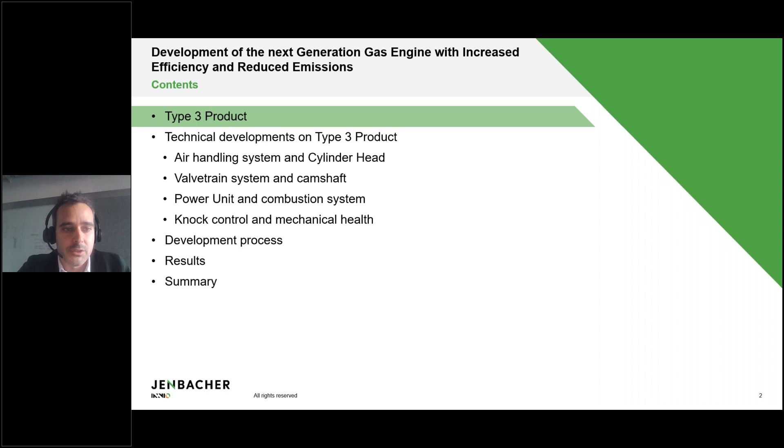I would like to focus later on the development process as well, which are the key steps, what have been the key enablers to bring us to those results as well. And then I will finalize with a fact sheet on this product and the latest results on it.

The Jenbacher Type 3 product has a long history. We have a huge installed fleet from the 312, the 12-cylinder engine version with power output up to 635 kilowatts electrical power output, the 316, the 16-cylinder version at 845, and the 320, which is the 1+ megawatt product that we have in our portfolio with more than 6,000 units delivered across the world.

A standard product, as you can see. Switch to the pointer. As you can see, bore stroke, it's at 2.44 liters per cylinder. It's a direct ignition combustion concept with a specific power output up to 18 bar BMEP, and the product is capable of 50 and 60 hertz.

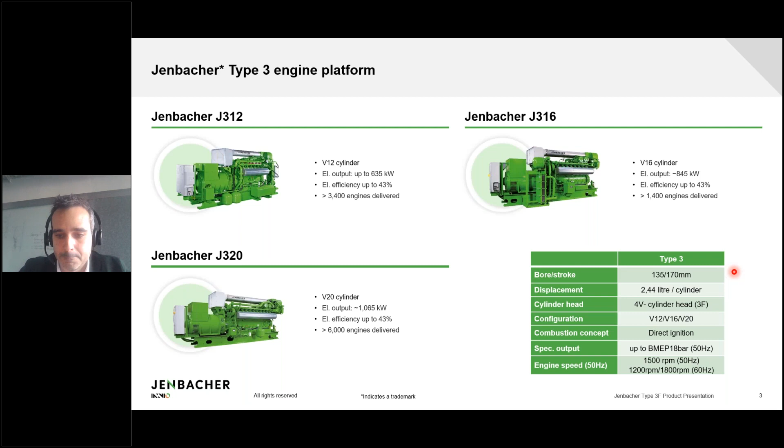So a bit more about the history of the product. When the development of this product started, it was in 1988 with the A and B engine versions running at a slightly lower power output and a lower efficiency, but it started to cover already a wide variety of fuels, biogas, landfill gas, and that has been one of the strengths of this product.

The fuel flexibility and the robustness to deal with a huge variety of different fuels. Afterwards, we moved to the Type 3C, which represents the biggest part of our installed fleet, covering as well a huge variety of fuels. In 2013, we introduced the Type 3D, and next year we are serializing the Type 3F, the next generation of this product, increasing efficiency, increasing fuel flexibility, and reducing hydrocarbon emissions. On top of it, as I will mention at the end of the presentation, we will release as well the Ready for Hydrogen, Ready for H2 package together with this product.

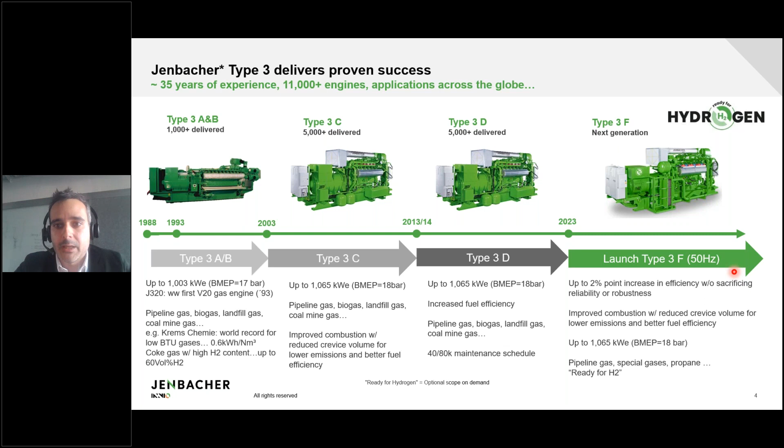Moving forward to the technical developments and product improvements we've introduced, we developed a high-performance cylinder head. The development steps started from 1D simulations, defining the valve sizing and port flow based on 1D analysis, then determining the right ratio of intake to exhaust valve diameter based on the 1D simulations and port flow measurements.

This has been the optimization path we followed to reach the most efficient PMEP and the most efficient gas exchange. Beyond that, we took actions to understand skew angle, flow, and port type to select the right trade-offs with the design constraints, looking at the mechanical CTQs from the FEA analysis, and optimizing swirl level and flow ratio around the two ports of the 4-valve cylinder head.

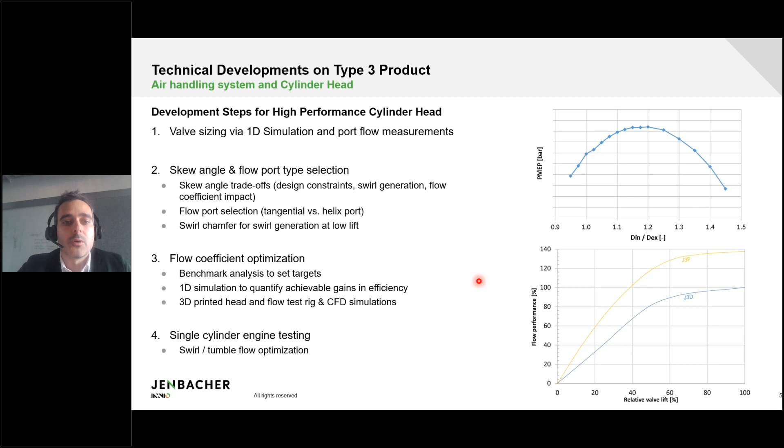We went through an optimization loop of the cylinder head flow by adapting the ports, and by doing that we managed to increase the flow performance in average intake and exhaust by 30 to 40%. That was one of the biggest enablers for the fuel efficiency increase on this product, all while sticking to the same combustion concept proven to be very robust and reliable for the variety of fuels.

We went through an additional development on the valve train and camshafts. We adapted the camshaft profile for the introduction of a 4-valve cylinder head on this product, which wasn't available yet. We went through an iterative process of performance optimization, mechanical analysis, and the final check of all the CTQs and requirements.

Those have been the loops we went through with the objective of optimizing gas exchange and volumetric efficiency, reducing hydrocarbon emissions, but also providing sufficient knock margin to enable higher, further increased fuel flexibility for this product.

Since this is a well-established product in the market, one key focus was maintaining reliability. This is why it's been one of the key development targets, focusing on mechanical requirements and choosing the right trade-offs. Optimization variables included valve timing and valve lift to match the gas exchange, adapting the Miller timing and valve overlap to meet our targets on hydrocarbon emissions.

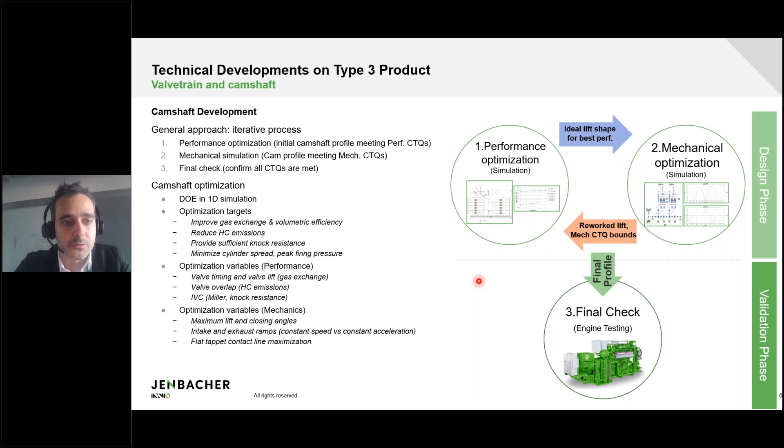That helped increase the knock margin and also reduce hydrocarbon emissions through a shorter combustion duration, ensuring that at the point of exhaust valve opening we had a successful, more complete combustion that reduces hydrocarbon emissions.

Beyond that, we went a step further to optimize the piston bowl shape for different compression ratios, so we could have a product optimized for different applications in terms of compression ratio.

To have an optimum solution for all those variants, we went through a loop of optimization on the aspect ratio of the bowl shape, enabling an additional efficiency increase for those increased compression ratios, and therefore we achieved an increased knock margin and improved efficiency on those higher compression ratio versions.

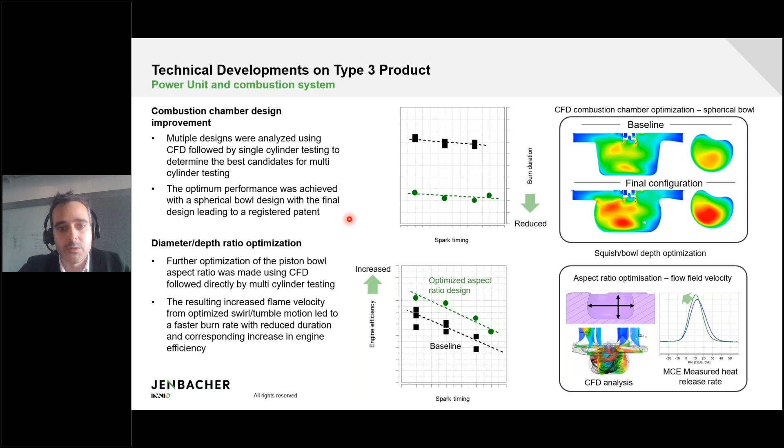We went through that process of iterations between the CFD and single-cylinder engine testing, and the final optimization was conducted at the multi-cylinder engine at our development test benches to achieve this goal.

Knock control and mechanical health are definitely a big benefit of this product as well. We introduced a state-of-the-art knock control system to enable increased fuel efficiency, increased overall efficiency, and increased fuel flexibility. By introducing that, we also had a chance to introduce additional mechanical health features that enable condition-based maintenance, allowing our customers to plan their service interventions with more flexibility.

Those measures are only possible because of the enhanced detection of valve closure and knock behavior. We now have closer detection of the different events in the cylinder head, and can adapt our combustion chamber cleaning intervals and lash setting intervals to those events. This is one of the big benefits of the system we're introducing now on the Type 3 product.

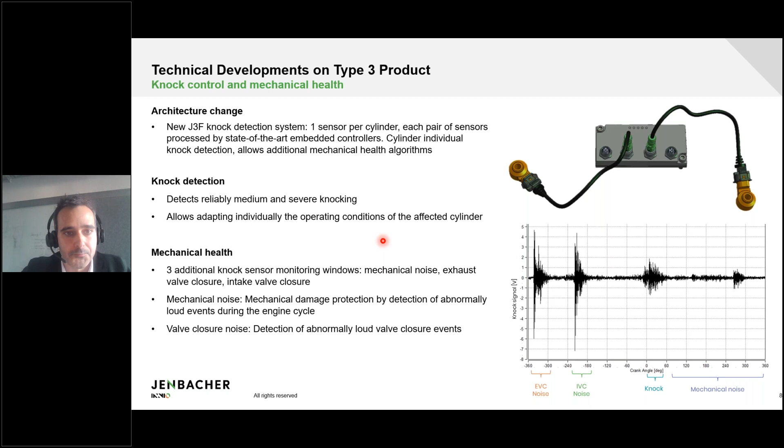We started from a very detailed requirement document. We broke that down into all the different subsystems so that we had clarity for each on the requirements and the test, the DVP&R, that is the design verification plan and report for this product. So at the end, we developed a test plan that was derived from the requirements.

and was derived from the risk management tools, or from the FMEA. At the end, the FMEA plus the breakdown of requirements to the subsystem level enabled us to come up with a solid test plan that brought us to the final successful results.

We based that on the classical V model, making sure we have the requirements laid down and clarified for each of the subsystems, and that enables us to go through all the systems case by case and requirement by requirement, making sure we have full understanding and a clear validation path for each of the different subsystems.

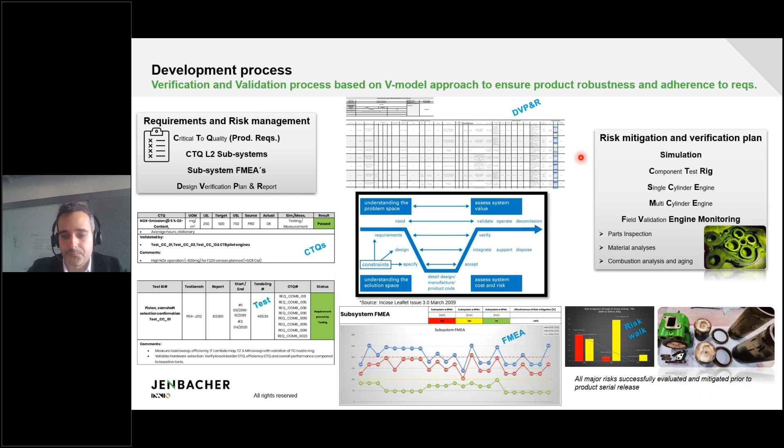As a summary of this product and this product improvement, we have introduced a flow-optimized 4-valve cylinder head that enables fundamentally an improved gas exchange and improved efficiency.

We have introduced a new power unit that reduces hydrocarbon emissions by tackling crevice volumes, and as well introduces a modified combustion bowl shape that improves fuel efficiency and reduces the burn duration, therefore increasing fuel efficiency as well.

We have also introduced a more service-friendly and improved valve train system that reduces maintenance efforts by pretty much 30 to 40%.

We have introduced here as well, as part of this product, a modular and flexible coolant piping that enables more modular service activities on the engine as per needs. And we have introduced, as I stated before, a cylinder-individual knock control for improved fuel flexibility and condition-based maintenance.

The new camshaft enables definitely increased efficiency and reduced hydrocarbon emissions by reducing valve overlap and optimizing the gas exchange.

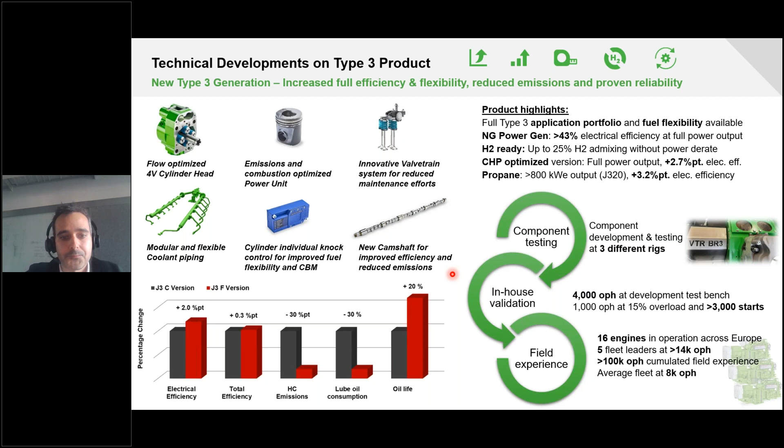And having that as summary, I'm at the end of my presentation and happy to get your questions.

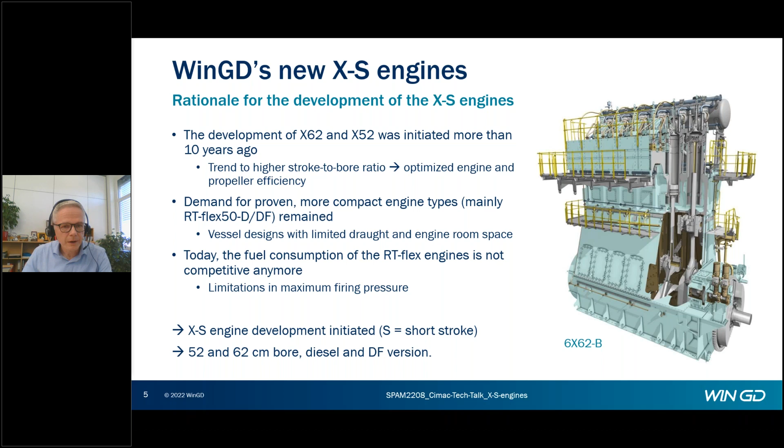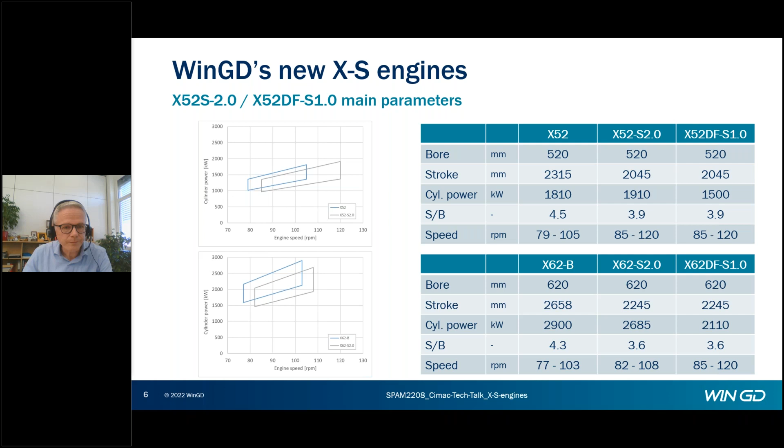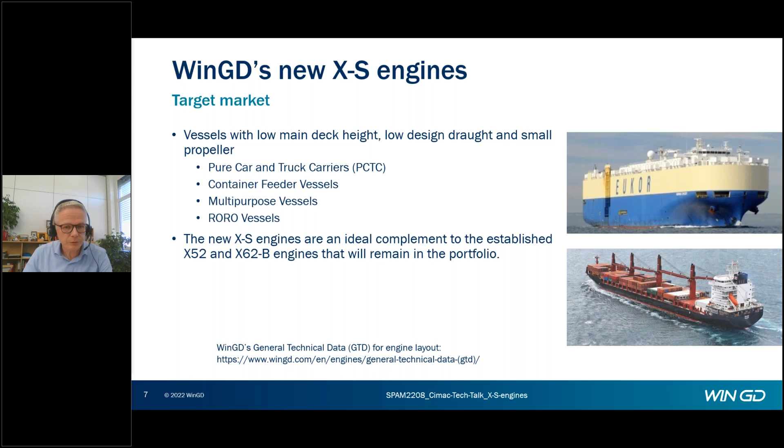For the following slides, I will focus on the 62 version, as this is the one we developed as first. All what I say there is also valid for the 52, so don't worry if 52 is not mentioned anymore.

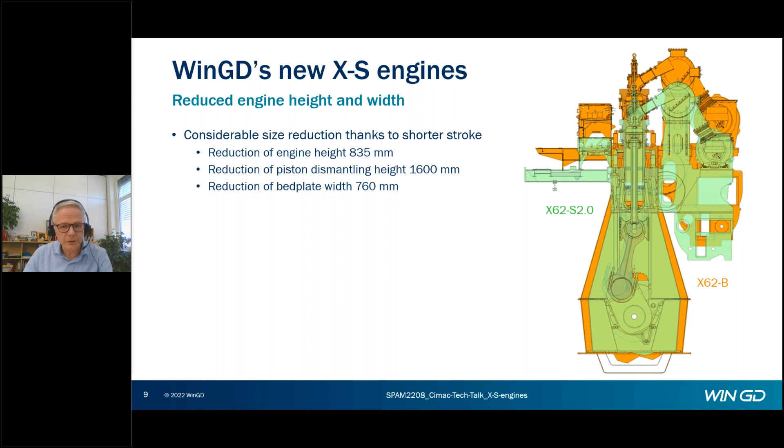The third dimension, there a bit more was needed to reduce also there the dimension. This is the engine length. First, we reduced the cylinder distance for these new engines. One of the two bigger measures or main contributors are the flexible girders. They are allowing more flexibility in the main bearings, so the main bearing can better adapt to the movement of the crankshaft, which cannot be influenced, and by that it was possible to reduce the width of the main bearing.

And the width of the big end bearing is also reduced compared to the X engines by changing the shape of the connecting rod. You can see it here on the right side. This is the XS and this is the X, and here in the lower part there is more material, so the width here is getting bigger. We call it trapezoid shape, what leads to a better force transition from the firing force to the bearing, reducing the peak loads, and by that we were also able to reduce the width of the bearing shell here.

Then also the driving end was optimized. We apply a small supply unit, very similar to what you know from the RT-Flex 50 already. By this we could reduce the sizes of the housings where the supply unit is attached. Then the gear wheels are reduced in size.

First of all, I showed you the picture of the engine width. So the gear train needs to be shorter by obvious reasons, and also by applying this smaller supply unit, the width of the gear wheels could be reduced, and by this the length of the driving end section. Plus, we were also able to optimize the thrust bearing girders to a certain extent.

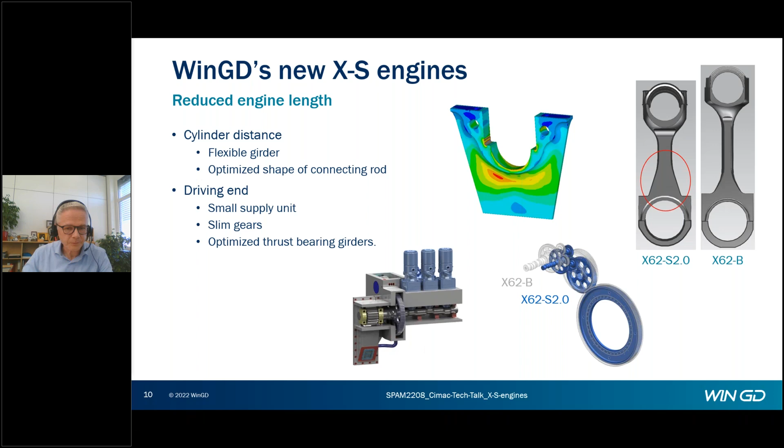This diagram shows then the result of all these efforts. You can see that for a 5-cylinder engine, the XS62 is roughly 10% shorter than the X type, very similar in length as the old RT-Flex 58T, but the XS62 has a power up compared to the 58 of roughly 15%. And the effect of all these improvements regarding height, width, and length are also well represented in the weight of the engine. So the XS type is about 15% lower in weight compared to an X type.

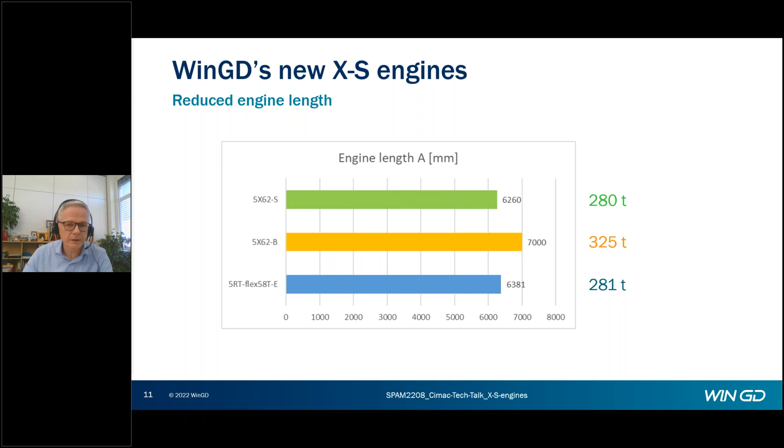The advantages of these more compact engines are, first of all, the easier accommodation in the engine room. This was also the main target of the whole development. Then the weight of the whole engine is reduced, and of course also many of the main components, which can possibly also reduce the crane capacity in the engine room.

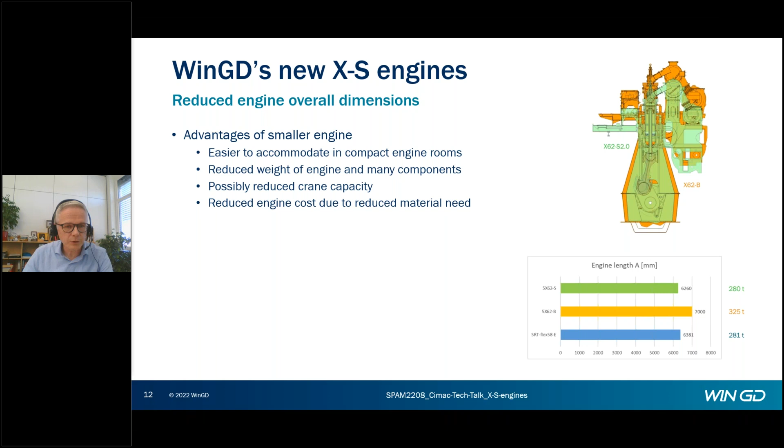Last but not least, reduced engine cost obviously also means reduced material need, as the materials are still the same - no exotic materials, just standard materials - and by this we could reduce considerably the cost of the XS engines.

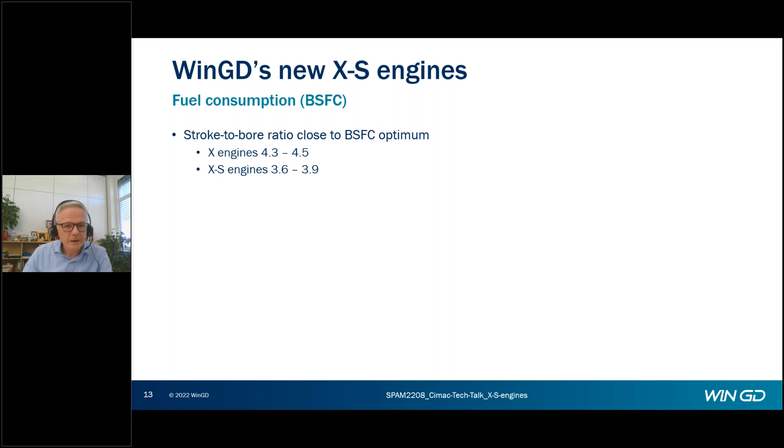There is no big disadvantage on the BSFC, the fuel consumption, as with the XS engines, where we have a stroke to bore ratio of almost 4, we are quite close to an optimum, maybe a bit above 4. On the other hand, we have higher firing pressure with the XS engines than with the X engines, and by this it was possible to reduce the fuel consumption of the XS engine in comparison to the X engines by several grams over the whole load range.

You can see here one typical example for 75% load. By this, finally, the shipyard, engine builder, and owner can select if they want to go for the X or the XS. The X may have a bit of advantage on the propeller side.

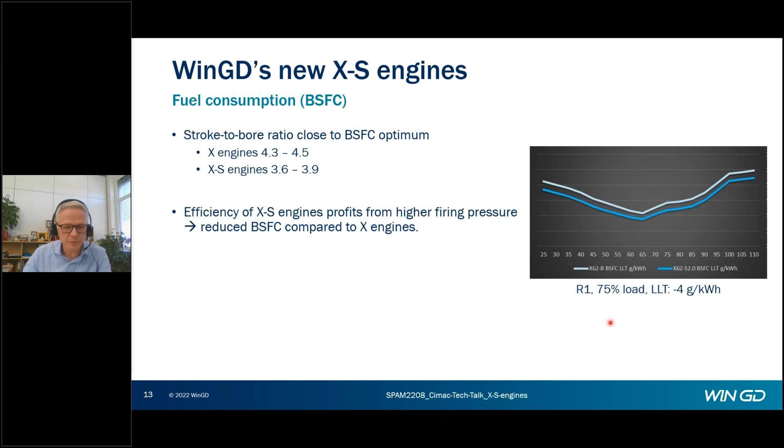What is known, what is new from a technology point of view? Typically, when we start developing a new engine, we are using concepts which are known from other engines.

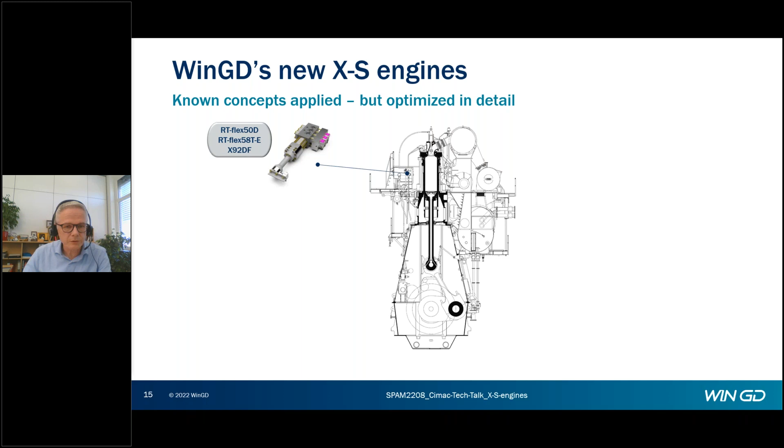I show here some examples of the XS types. We apply the ICU, the injection control unit - I will show another slide on that later. A known liner concept, I already showed the supply unit. Then we have the well-established jet shaker cooled piston with 2 piston rings, the built crankshaft, and the bed plate. So many things are known.

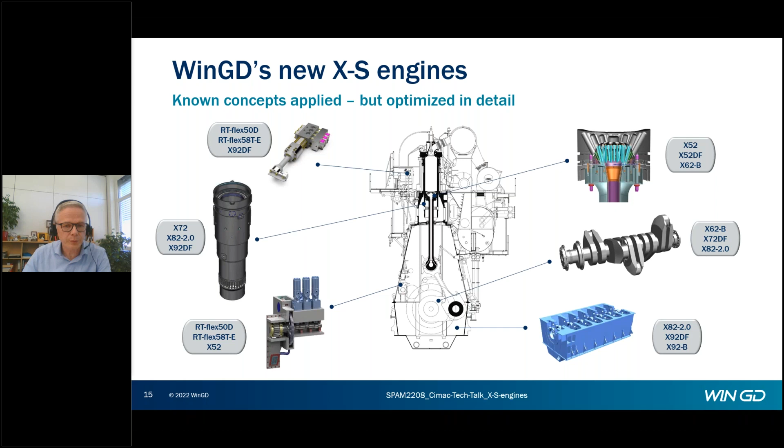This is also an advantage for the manufacturer, because they know how to produce these components. And of course, also from our end, we know how to design these components, because we have a huge number of engines in operation and a lot of experience with these components.

Something that is new on the XS engine, not entirely new but quite new, is the control system, the WiCE control system, which very much uses the concept of the known UNIC and WECS control systems, but using more modern electronic components. Every now and then you need to make an update on electronics with increased CPU power. We improved the user interface, and also the new control system enables remote monitoring.

As I said, it's not entirely new. Since about 2 years, the first 12-cylinder X92 DFs are in operation, and since then we started rolling out the new control system to our whole portfolio. It's not yet concluded at the moment.

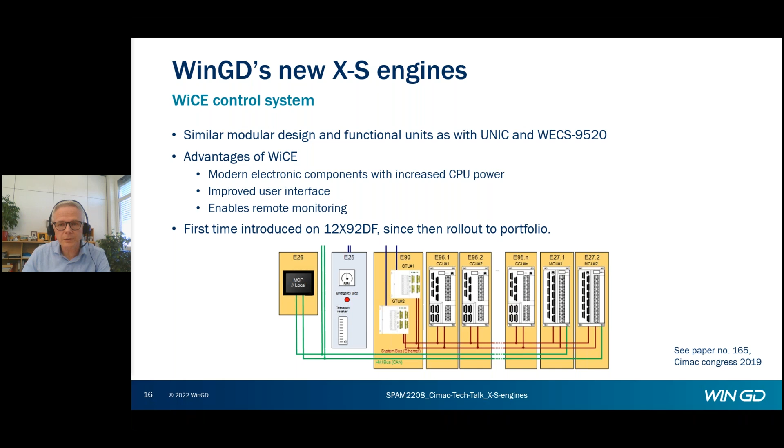Then I already mentioned the injection control unit. This is a concept which was introduced more than 20 years ago on our very first RT-flex engines. It features a volumetric controlled fuel injection, and it has 3 rail valves, so each fuel injection valve on the cylinder cover is controlled individually, allowing for optimized control of the injection.

There were several steps of improvements, that's why we call the current version Mark 3.5, leading to an excellent service experience and long time between overhaul. We asked ourselves at the beginning if we go for the ICU or for the time control injector.

Due to the pressure from the engine builders, we decided to go for the ICU because we have a well-established manufacturer base in Asia. The engine builders prefer this. Several manufacturers are able to produce these ICUs directly locally in Asia. And on the customer side, the ICU is well known for easy onboard maintenance, which can be done by the crew.

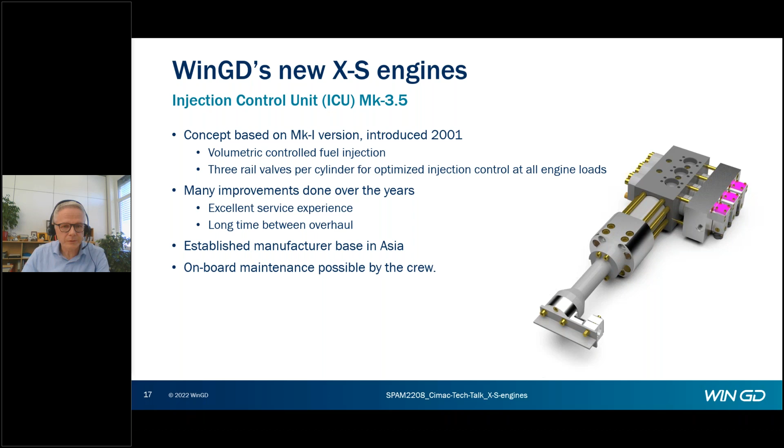Another novelty of the XS engines is the integrated SCR, or the ISCR.

Today's concepts have an integration of this T-pipe, plus a quite big SCR in the engine room. Our solution for this, at least for some applications, is the so-called ISCR, where we have the catalytic elements located right below the exhaust manifold.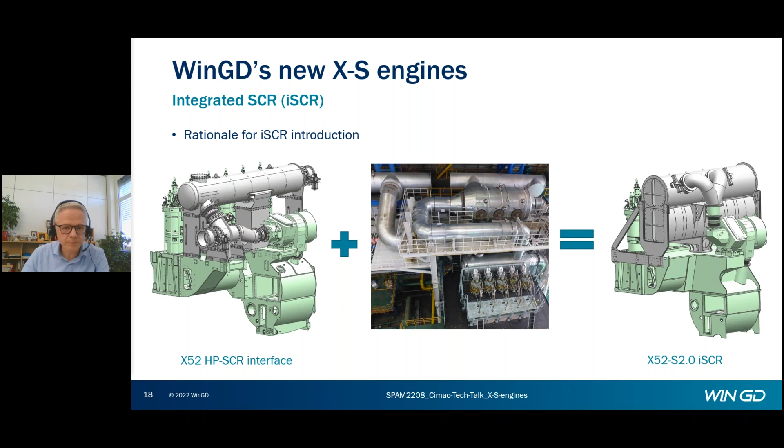This offers a lot of advantages for shipyards and designers because everything gets more compact, no space is needed for the reactor in the engine room. The engine is delivered already with everything installed, tested, and integrated in the control system. And from a technical point of view, the process temperatures are also higher because it's a short way from the exhaust manifold to the reactor.

The compact design was possible by using catalytic elements with higher cell density and by limiting ourselves to SCR operation with fuels with low sulfur content.

A very first ISCR is already in operation on an X52 engine, not exactly the same design, but very similar, to see how this whole concept is working in a normal marine environment.

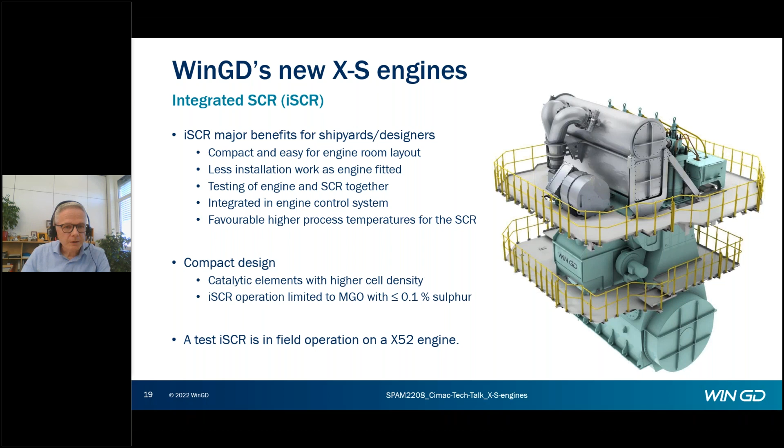They leave the exhaust manifold on both ends through these valves. Then they go to the catalytic elements, marked here yellow in the lower part. Then the exhaust gases go back up again, and then finally also to the turbocharger. On the left side you can see a small picture of how this looks on the engine with turbocharger and charging unit.

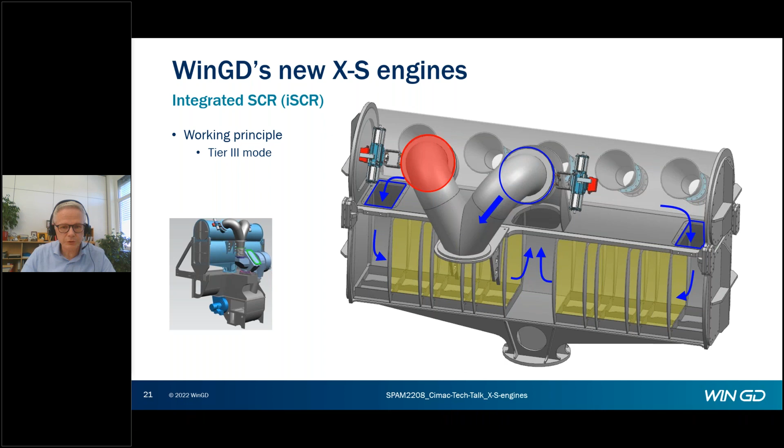The DF engines as such are not new, the DF versions. They are based on the well-established low-pressure gas concept. They feature two gas admission valves in the mid-stroke area and two pilot valves, which are used to ignite the gas in the combustion chamber.

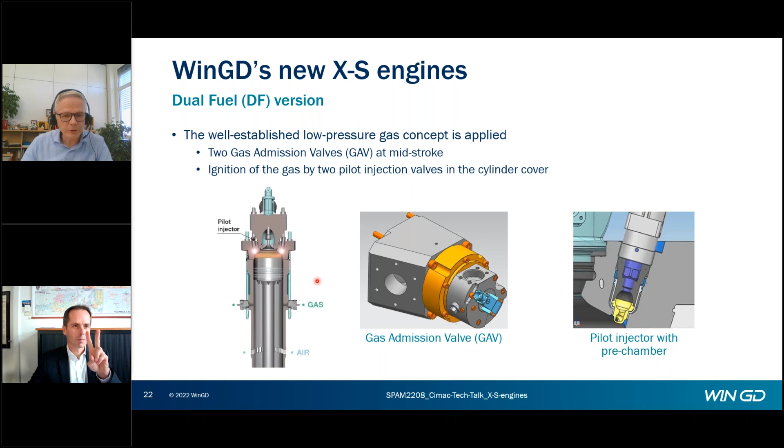What is new, not only to the XS engines but to all the DF engines, is the ICER concept. This is our EGR concept for DF engines. Here we have, after the turbocharger, a back pressure valve which controls the gas flow. About 50% in ICER mode go through this channel, through the exhaust gas cooler, and then back to the compressor.

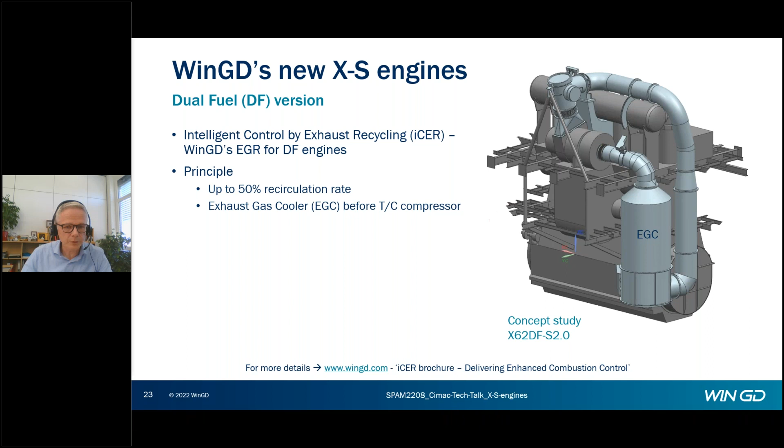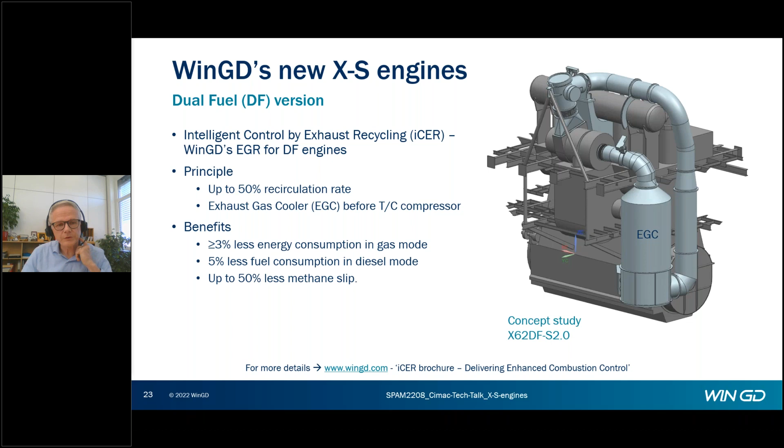The benefits of this are especially in gas mode, a more stable combustion, so we can better optimize the whole combustion process, which leads to an improved energy consumption in both gas mode and diesel mode. And as the gases are reused in the EGR concept, going through the combustion space again, there is also a considerable reduction in methane slip, which is also more and more in the focus nowadays.

With that, I've come to my last slide, the conclusion. So why did we develop the XS engines? These are engines for compact applications where space is limited. We developed 52 and 62 bore engines, both in diesel and DF variants, and they complement the existing engines in the portfolio.

They are reduced in height and width thanks to the shorter stroke. They are reduced in length thanks to many optimizations, leading to advantages regarding installation, engine weight, and production cost.

I showed several components which are built on known principles. I showed a few new features like the ISCR, the ICER, or the WiCE concept. And last but not least, we can report already first orders for the 62 variant of the XS engines. The very first one will be on testbed somewhere by end of next year.

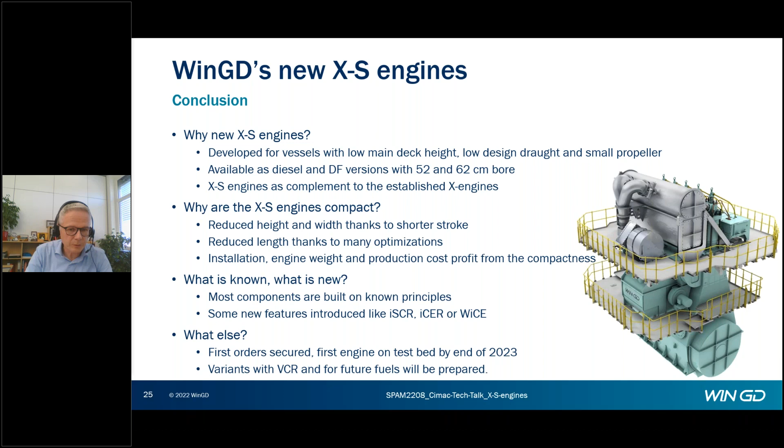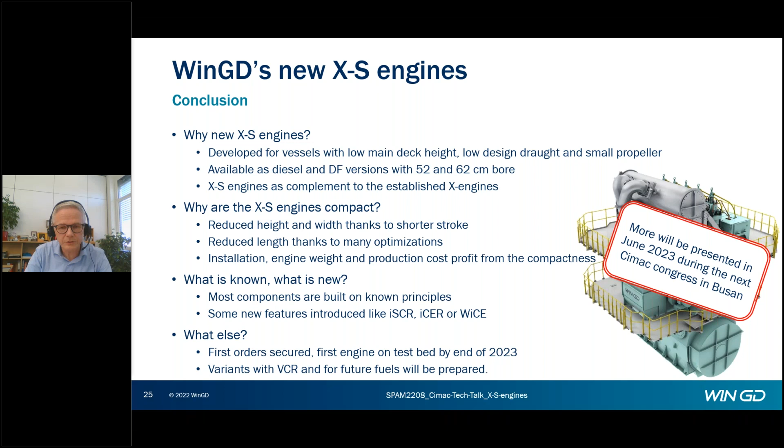And of course more technology will come on these engines. For example, the variable compression ratio concept, VCR, and of course the engine will be prepared later for all coming fuels. All about this and many other things we will report in next year's CIMAC Congress in Busan, hopefully.

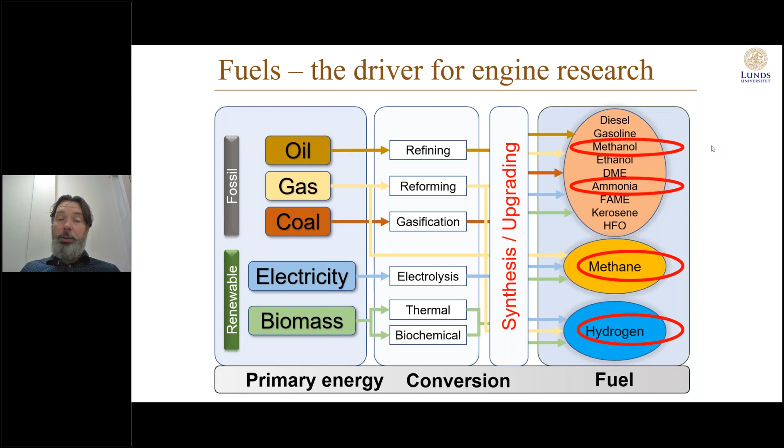That's where a lot of future developments are heading into. But what we also know is a large installed base of engines is compression ignited engines, diesel engines. It's not very realistic that all these engines are converted to spark ignited engines in a very short time frame, and for that reason there's a big interest in dual fuel engines in all kinds of markets. And the work that was done here was on a dual fuel engine using methane as the main fuel.

It was done on a Wärtsilä engine. This engine is sold as a diesel engine or as a dual fuel engine, where the methane is port injected into the intake manifold. So it's pre-mixed, and just before top dead center, a small amount of diesel fuel is injected as a pilot injection, and this actually starts the combustion.

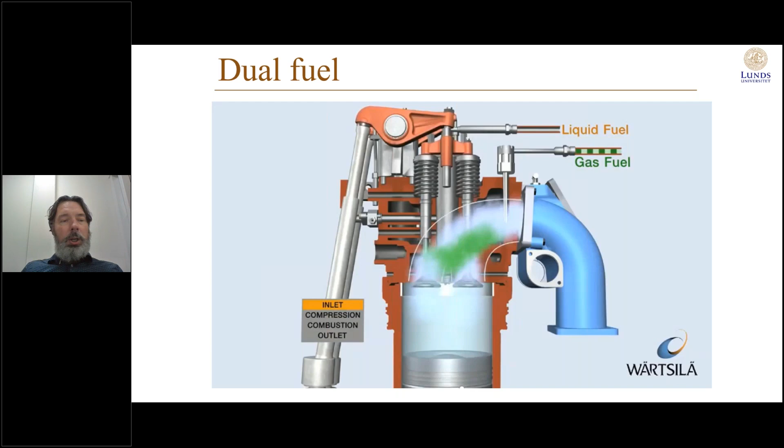What kind of engine are we talking about? It's a Wärtsilä W20DF, so it's a 200mm bore engine, 8.8 liter per cylinder. We did all the tests at 900 RPM. It can run 200 bar peak pressure, 4 valves per cylinder, and this experimental setup at Lund University is running electrohydraulic valve operation. So basically we have all kinds of freedoms to operate intake and exhaust valves with variable lift and timing. Completely cameless test configuration, which is very nice for experiments.

For this experimental setup, the engine is also equipped with a common rail. We can go up to 2,300 bar. For this test, the pressure was not that high. As I said, it's a combination of diesel fuel and natural gas, where we did run a global lambda of 2, which seemed to give the best results. Let me tell a bit about the trigger of this research. Why was it done?

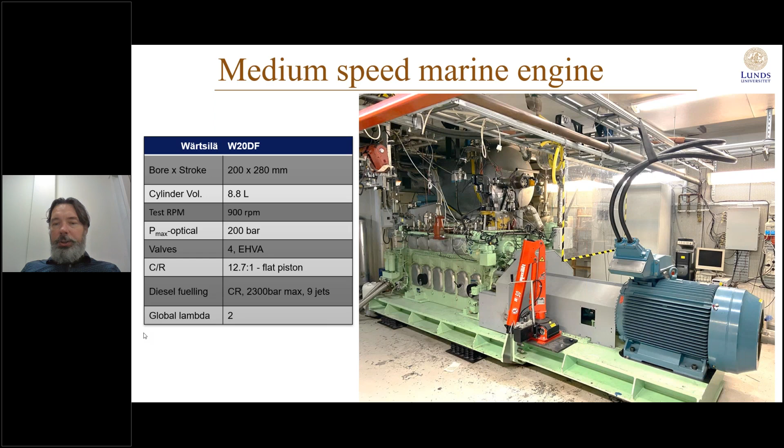Someone who worked on this engine before me found an interesting relation between pilot timing and start of combustion timing. Looking at the right side of this graph, from -30 towards top dead center, we see typical diesel engine behavior. When we go to earlier injection, we have earlier combustion, which is very common, that's what you would expect. But at a certain moment the relationship changes, and a further advancement of the pilot timing leads to a further retarding of the start of combustion. This first phase is typically conventional dual fuel, same behavior as a diesel engine.

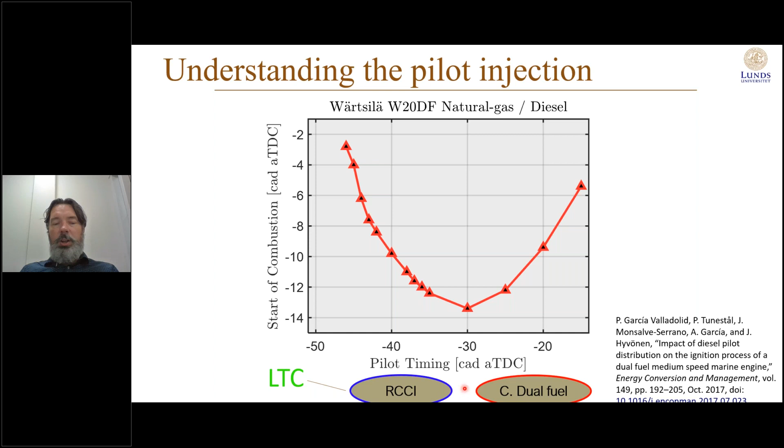What we see with this even more advanced timing is that it starts to run in RCCI mode, reactivity controlled compression ignition. That's a typical low temperature combustion system, where with very strong dilution of your pilot fuel you reduce temperature and reaction speed, which can be very beneficial for NOx production and efficiency. But we wanted to have a better understanding of why and where this relationship changes and what the effects are.

To find that out, basically three different campaigns were run. The engine was run in optical mode, converted to an optical configuration, a Bowditch mode with a glass piston, where with a high-speed camera we could look into the combustion chamber. Then we did a set of emission measurements on the metal engine, which is the main part of the results I'll present later on. Based on the optical research and emission measurements, a conceptual model was developed that explains this relationship between what you do with your pilot and when combustion will start.

But let's continue on the emission measurements that were the bulk of this talk. The goal was to find data, to have optimal test points for the optical research, to find out where we could find the best behavior, and also to improve the understanding of how this pilot injection ignites the combustion and what the results are.

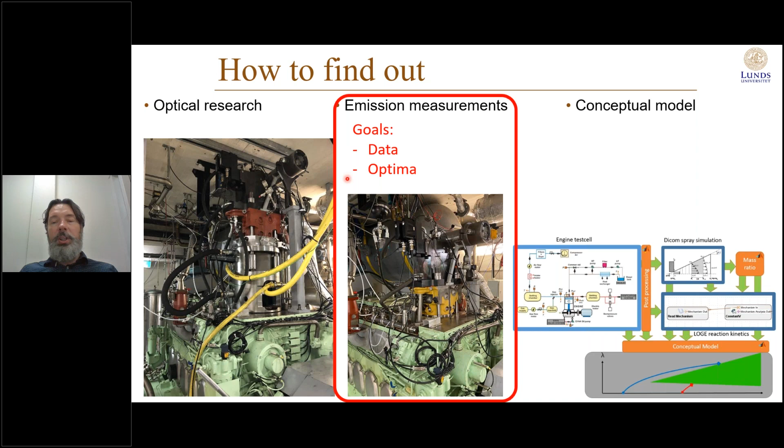A small sidestep on this optical research - as I mentioned, RCCI results in strong dilution of the pilot injection. An interesting question is, can we see that this happens? Yeah, we can see that. What you see here in the top left corner is the view through the glass piston into the combustion chamber, and we can make recordings for every individual combustion cycle and record visible light coming from the combustion.

When you look at this graph in the left lower corner, there we see the recording of light during the combustion cycle. On this axis we go through the combustion cycle, top dead center, and then position after top dead center. Following this arrow we rotate through the combustion chamber, with this angle between -180 and +180 degrees, so we follow the complete shape of the combustion chamber. There we can clearly recognize these nine individual peaks, which are the jets of the diesel injector.

So what we can clearly see in pure diesel combustion is that combustion takes place around the diesel jets. When we go to conventional dual fuel, the upper right graph, we can still recognize these nine different jets. The pilot injection is very small, so there starts to be some deviation between the nine jets. The intensity is much lower, but still you can see that in this conventional dual fuel mode, combustion is taking place around these jets - that's where the high intensity of light of combustion occurs.

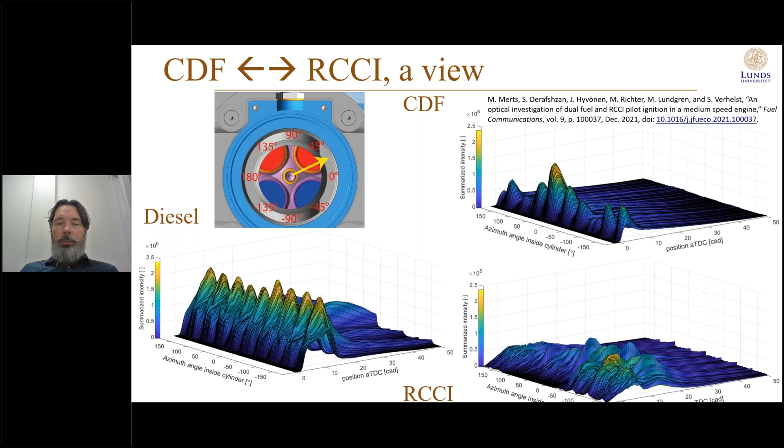The whole idea of this strong dilution is that it reduces peak temperature, and for that reason reduces NOx emissions. Can we recognize that in the emission measurements? That's what you can see in this graph for a medium load case - a reference load of 14 bar IMEP. You can clearly see the gold brown line representing NOx emissions in grams per kilowatt hour, indicating that once we go into that early area, NOx significantly drops off. So we can reach very low NOx emissions by strongly diluting this pilot injection, getting below 100 ppm.

Serious reduction. When we go to the more diesel-like timing, we can get very high NOx emissions, and once we retard more than that, NOx drops off again. That's what we know from typical diesel engine behavior.

The emission of uncombusted hydrocarbons, which is important when you run on natural gas or methane since it's a very strong greenhouse gas, has more or less the opposite behavior. In the area where you have high NOx production, you have the lowest hydrocarbon emissions. Once you go to very strong dilution of the pilot, so very early pilot injection, the emission of hydrocarbons starts to increase again.

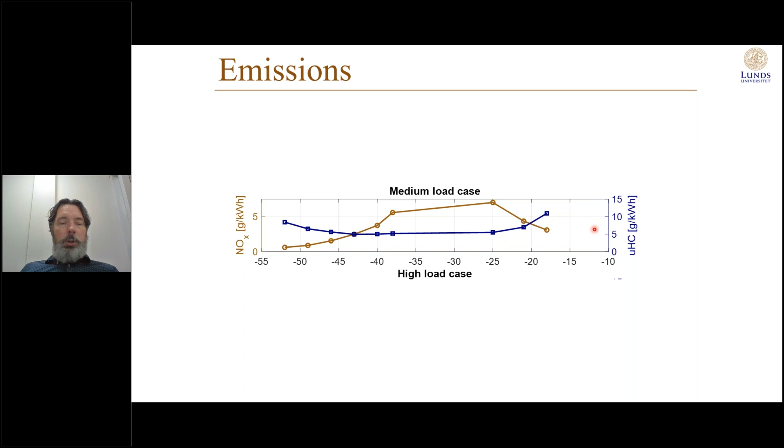What you could also recognize on this graph is that we have limited testing points in the middle, and there's a clear reason for that. When you run into knock problems, it is limited by knock, and since that was not part of this research, we didn't go for the highest values or try to get as close to the knock limit as possible, so we just skipped these testing points.

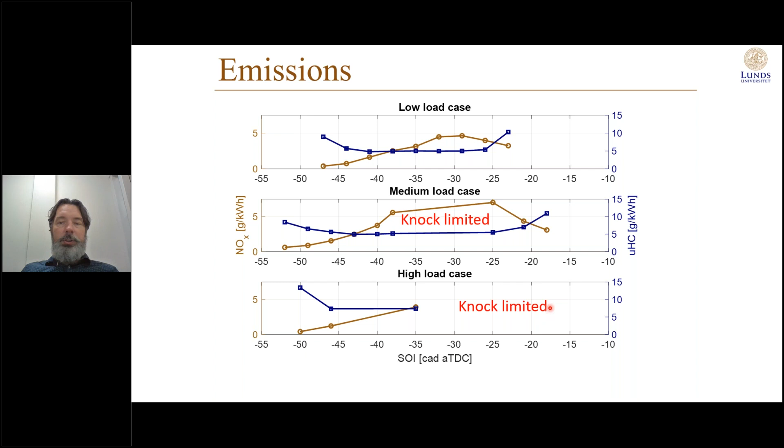So this is emissions, which is of course only part of the story. We're also interested in efficiency and phasing. There you see more or less the opposite of the previous graph. Efficiency is the golden brown line.

Let's have a detailed look at the medium load case. Highest values can be found in this early timing range. RCCI, with this lower temperature and for that reason lower heat losses, has an advantage here. When you go earlier, efficiency drops off again, mainly because your combustion phasing, represented by the blue line, is too late, so you're taking less effective work out of your process. The same happens when you go to conventional dual fuel operation.

The late timing results in the end in a late start of combustion and late CA50, so a late midpoint of your combustion process. And also here, for low, medium, and high load cases, we see the same trends happening.

An interesting point at medium load is this small drop in efficiency. Initially, when you go from very early to later, efficiency increases mainly because you are combusting more of your methane, so uncombusted hydrocarbons go down. But at a certain moment it drops again because your CA50 is below 0 crank-angle degrees, so the combustion process is happening really too early, creating negative work at the beginning of the combustion process.

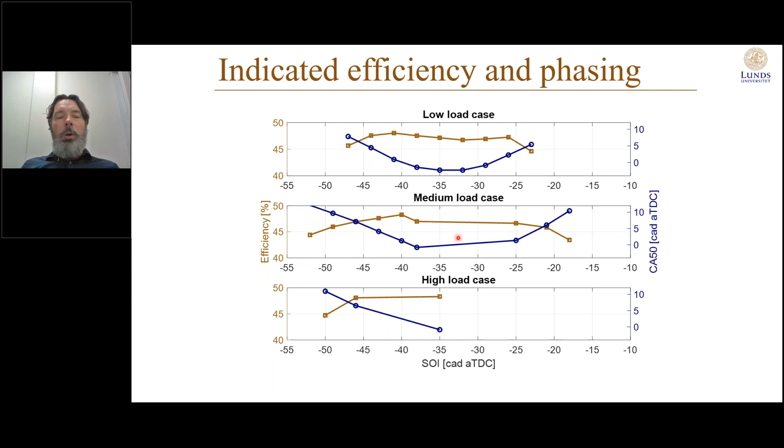What was also interesting to notice is that cycle-to-cycle variation was quite significantly dependent on pilot timing. In this mid-range, where you typically have the highest temperatures, you have the lowest cycle-to-cycle variation. When you go to very early pilot timings it increases, and when you go to very late pilot timing it also increases.

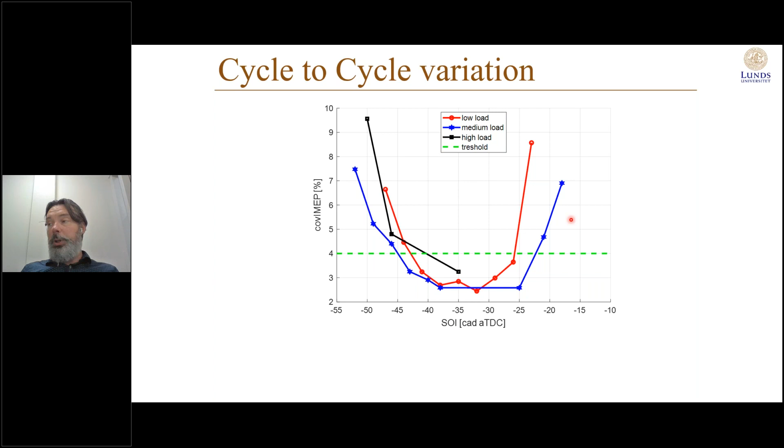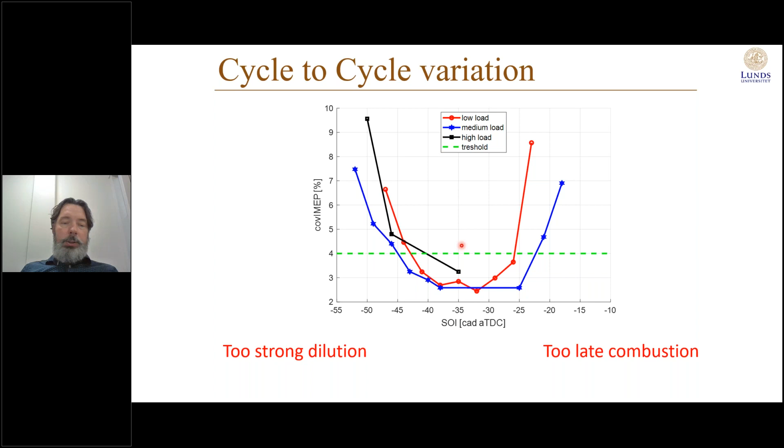We found out it has more or less the same behavior as uncombusted hydrocarbons. So when you're on an experimental engine where you're not able to do emission measurements, for example in an optical engine because it runs in skip-fire mode, you could use cycle-to-cycle variation as an indicator of how complete your combustion is. Reasons for these high uncombusted hydrocarbon emissions: on the late side it's too late combustion, so low temperature, and on the early side it's too strong dilution, so the complete mixture is too lean. Your pilot injection is diluted too much, which is not beneficial for stability of combustion.

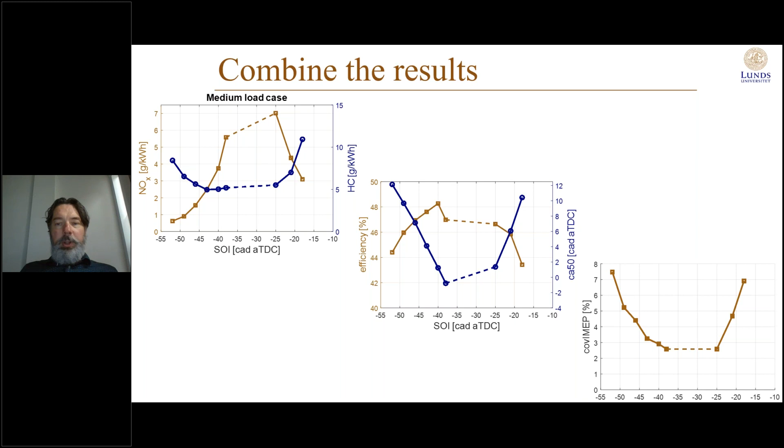Let's combine all the results we just saw for the medium load case, looking at NOx, hydrocarbons, and COV IMEP. It depends a bit on what your requirements are—lowest emissions, highest efficiency, or some generic requirements—but we can conclude that in this RCCI timing range, around minus 45 degrees crank angle, we have the best overall results. That's where you combine low emissions with high efficiency at a reasonable COV, though it depends a bit on application what COV is acceptable.

Yeah, we did look at a range from 3 to 5% as being an allowable amount of variation. So now we know where to go in the next optical campaign.

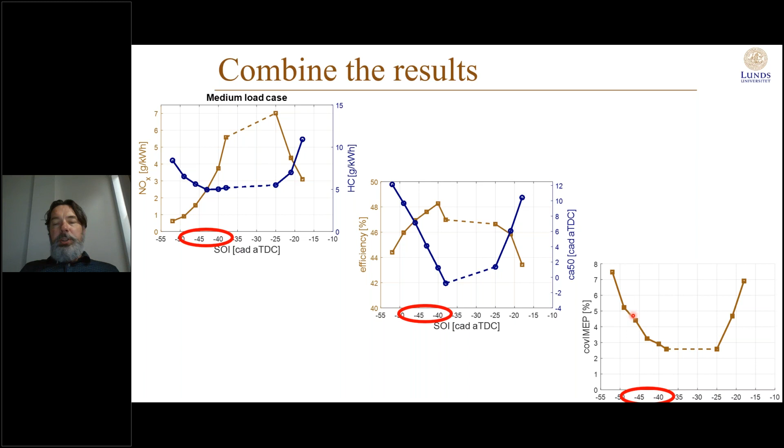As mentioned before, this RCCI mode is known for low NOx. Can we recognize that on the combustion profile? So we compared two pilot points, one with RCCI, one with CDF. Significant amount of difference in NOx production, 1 gram per kilowatt hour and 5 gram per kilowatt hour.

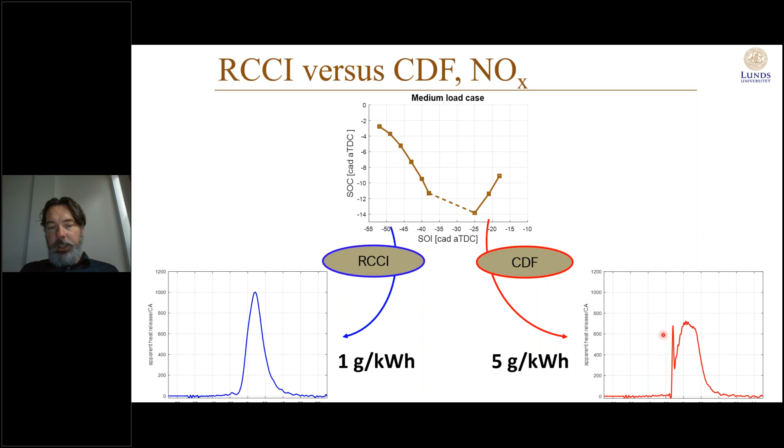This is the typical bell shape of heat release rate coming from the RCCI combustion. Quite different than conventional dual fuel combustion, where you can clearly see the initial heat release peak of the pilot combustion. And the interesting thing is,

surprisingly, it could be a surprise that the RCCI mode has a higher peak in heat release, but the conventional dual fuel mode has this peak much earlier. That means it happens in a small volume, and it happens at a higher intensity.

If you want to, in this small volume, create the same amount of heat release, it means you are creating a lot of temperature, and you're creating the temperature very early in the process. So that will mean that the total process temperature will go up during the combustion. And that gives an explanation of why this NOx production is so much higher in CDF mode.

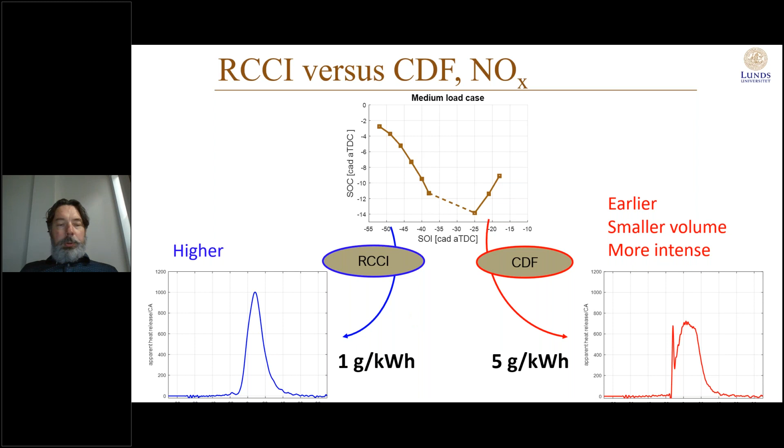I'm aware that this time slot was a bit limited, so it was probably a bit condensed in results, but hopefully we still have some time for questions, so feel free to ask.